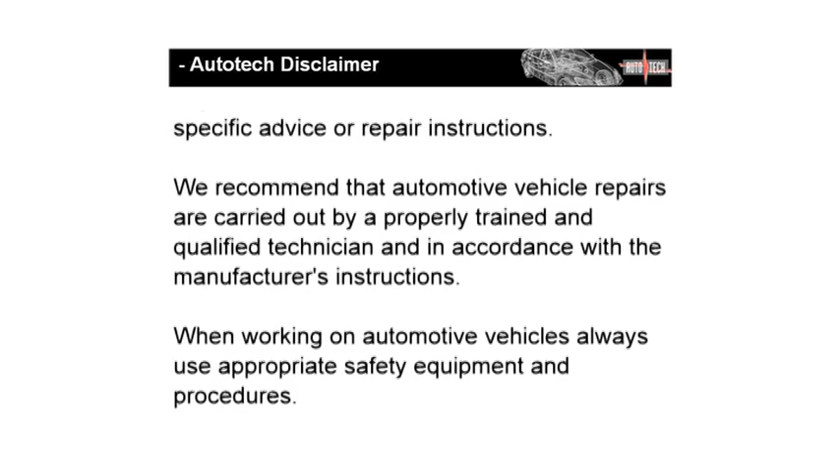This training video has been prepared for automotive mechanics who are trained in the repair and servicing of automotive vehicles and the use of related tools and equipment. The information contained in this training video is general in nature and does not contain specific advice or repair instructions. We recommend that automotive vehicle repairs are carried out by a properly trained and qualified technician and in accordance with the manufacturer's instructions. When working on automotive vehicles, always use appropriate safety equipment and procedures.

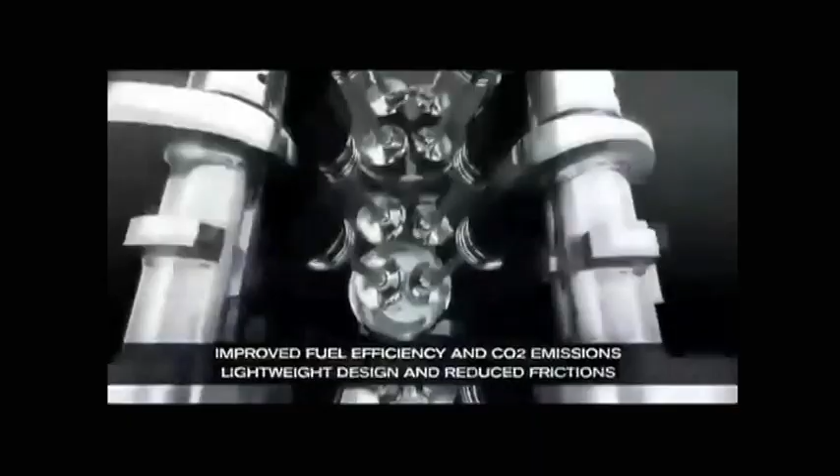Direct petrol injection, or DPI, was first invented in 1925 and was subsequently used in military aircraft engines during the years of World War II. Unsurprisingly, the first automotive application of DPI was initiated by Bosch in the 1950s. Over the following years, many experiments were carried out by Bosch trying to make this technology a success, but DPI was temporarily discontinued due to its high cost with little gain.

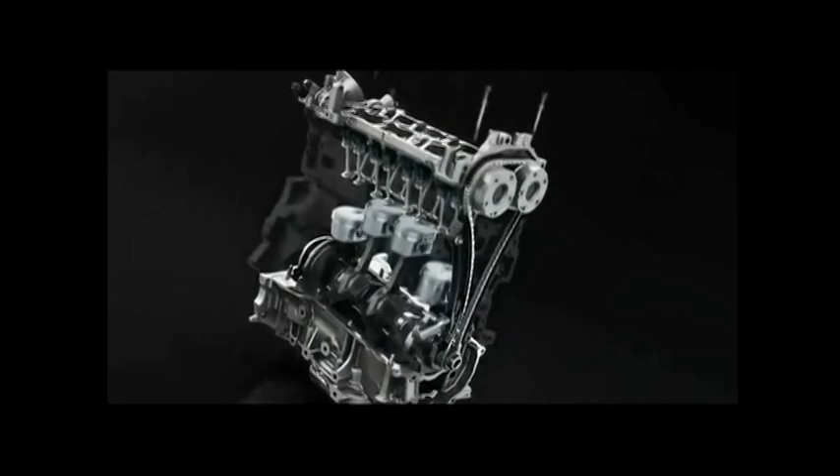Stepping forward into the modern era, it was Mitsubishi in 1996 that became the first mass producer of direct petrol injection technology. Since that time, nearly every mainstream manufacturer has designed and implemented their own version of the technology.

The topics that we'll cover during this video are the operating fundamentals of direct petrol injection. We'll look at the different components that are used and the repair and diagnostic procedures of each of them, the requirements for servicing, common issues that have been brought to our attention, and E85 fuel technology.

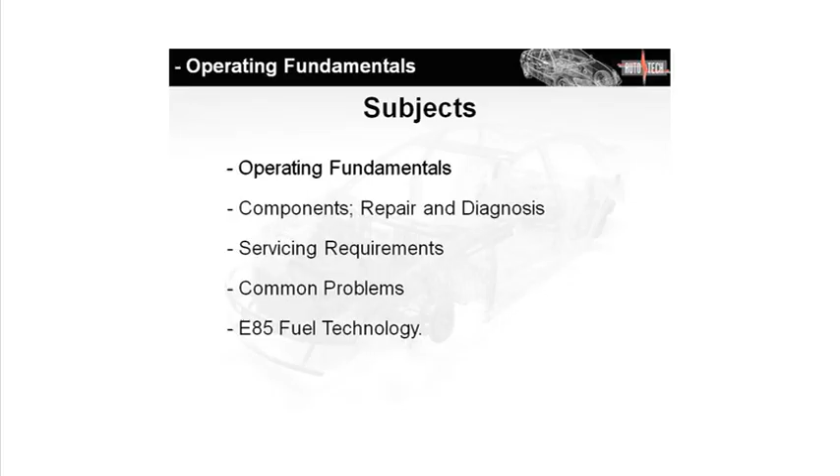A regular question we get asked is, why are manufacturers replacing traditional EFI systems with DPI? After all, a DPI system is more complex in both mechanical and electrical components. The answer is its ability to lower the exhaust emissions.

This chart shows clear evidence how exhaust emission levels have become tighter over the years and will continue to reduce in the future due to the requirements of Australian design rules. One of the biggest drivers of technology improvements in an engine is the car manufacturer's need to reduce exhaust emissions.

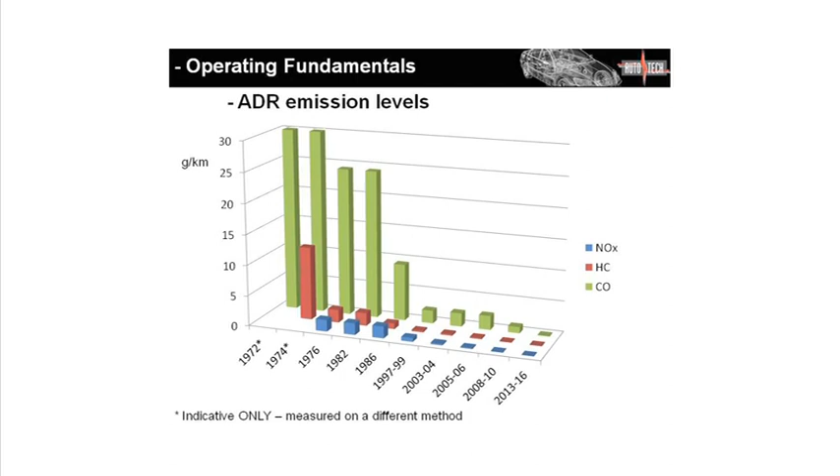Manufacturers are constantly searching for ways to improve fuel economy and ultimately reduce exhaust emissions. A list of technologies currently possible is shown here, showing each respective fuel saving. The column on the right indicates how beneficial DPI technology can be when compared to other technologies.

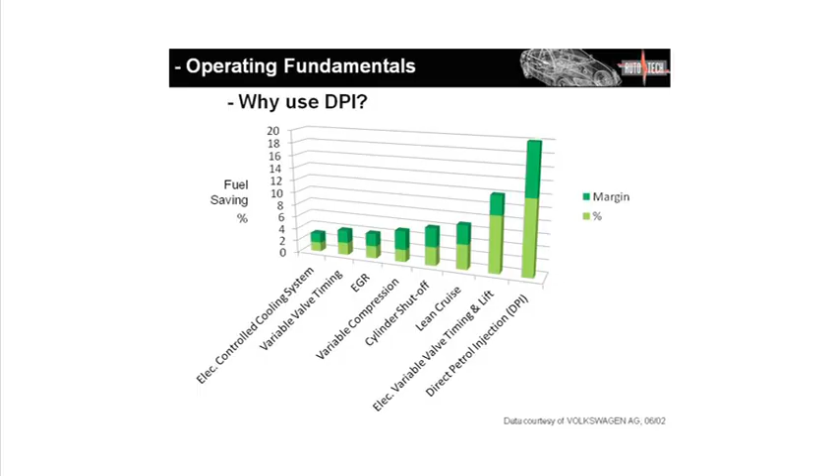So how many makes and models can you think of that have direct injection fitted? Here is just a small list of some of the most popular vehicles in the Australian market that use DPI. At the time of this video production, there were well over 1,500 models delivered by 24 manufacturers using direct injection technology. The first vehicle sold in the Australian market was an Alfa Romeo JTS back in 2003.

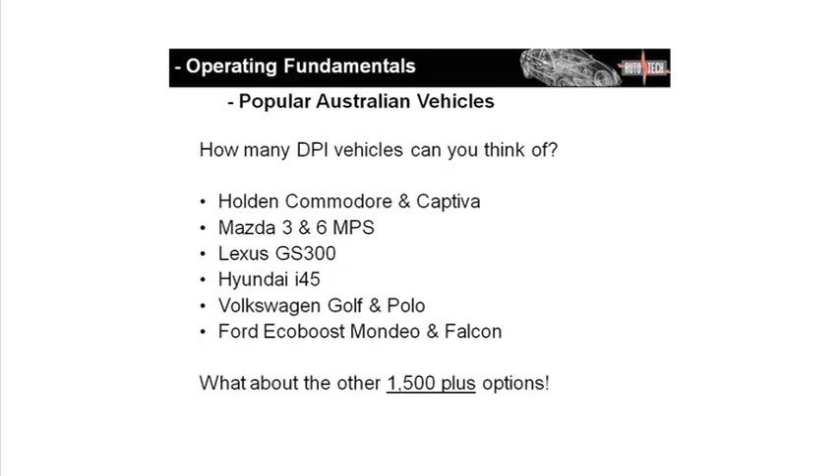When describing how direct petrol injection systems work, some unusual terms are used. These words describe the different operating modes of a DPI system: homogeneous charge mode and stratified charge mode.

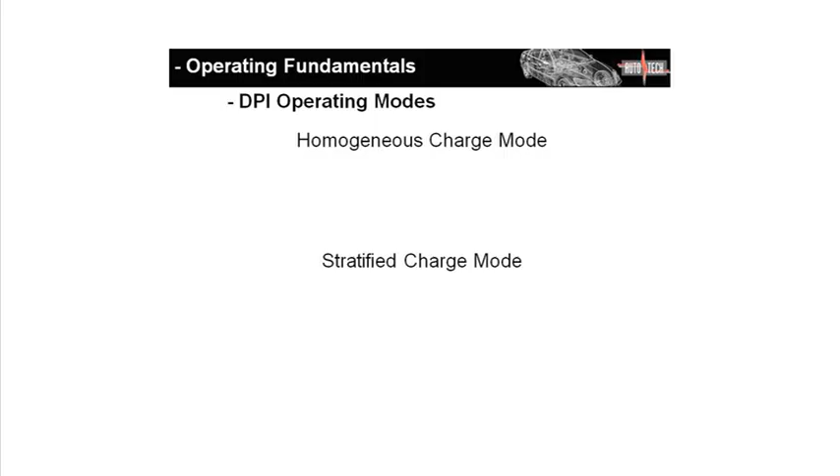Homogeneous means it's uniform in structure or composition. Putting that into real terms, it means that the fuel and air combination are well mixed in the cylinder. Stratified means to form layers. This is the opposite of homogeneous and describes when the fuel charge remains densely packed below the spark plug electrode.

First, let's explain homogeneous in a bit more detail.

As the piston starts the intake stroke, air enters the cylinder through the intake valve, and fuel is injected into the incoming air, resulting in a fairly well mixed or homogeneous air-fuel ratio. We also know this as stoichiometric ratio at about 14.7 to 1.

A benefit of injecting fuel into the air as it enters the combustion chamber is that the energy required to evaporate the fuel comes from the air itself. That air then cools as a result of the evaporation, effectively increasing the density of the air. The rest of the combustion cycle is similar to that of traditional EFI port injection.

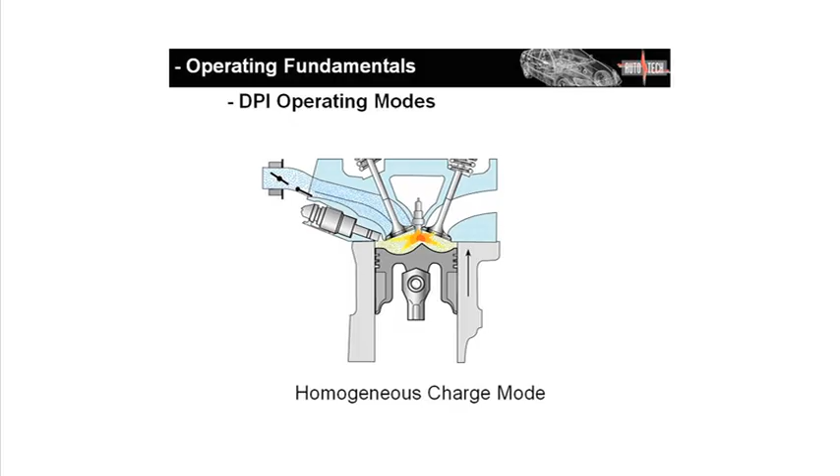Now let's look at stratified mode. As the piston starts the intake stroke, you can see that only air is entering the cylinder. You'll also notice that the intake manifold flap has closed off one manifold port. When the piston reaches the bottom of the stroke, you'll notice there is still only air entering the cylinder.

As the piston starts to compress the air, the shaped piston crown starts to have an effect on the way the air moves in the cylinder. It starts to loop upwards toward the spark plug electrode.

Nearing top dead centre, the fuel is injected. It's deflected upwards towards the spark plug by the shaped piston crown and focused in the area of the spark plug electrode. You can see here how the contents of the cylinder have become layered or stratified, forming a rich fuel mixture around the spark plug, leaving the remaining lean mixture to form a layer which insulates the cylinder wall from the heat of combustion.

Stratified charge mode injects very little fuel compared to that of homogeneous mode and can produce an air-fuel ratio of as little as 60 to 1.

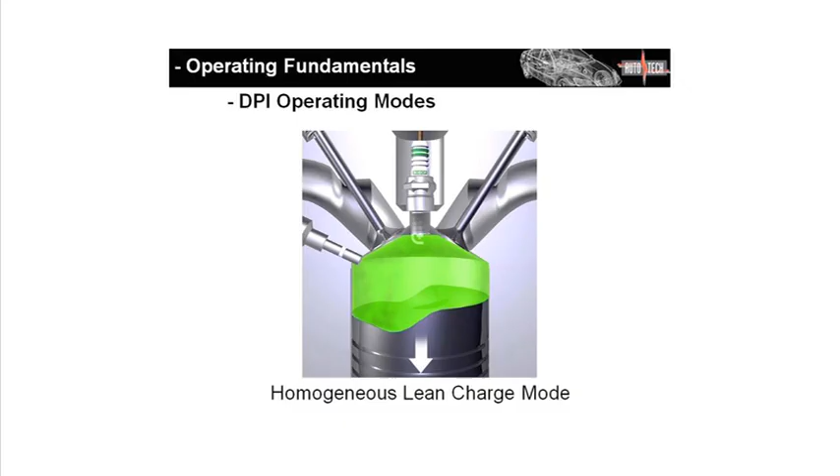There are a few variations of these two main modes. One of these is homogeneous lean charge mode. This works the same as the basic homogeneous mode, but runs a leaner air-fuel ratio of up to 22.8 to 1. The throttle plate will open to a greater amount to maximise airflow into the cylinder.

There are also various other injection modes that use a combination of both homogeneous and stratified. A combined homogeneous and stratified mode injects a lean fuel mixture on both the intake and compression stroke during changeover between the two different modes.

Homogeneous split mode will inject fuel in both the induction stroke and late in the power stroke to enable the catalytic converter to warm up quicker from the hot exhaust gases. This mode only operates for approximately 20 to 40 seconds after startup.

Homogeneous knock prevention mode means that under full engine load, the engine can receive 2 separate fuel injection events per combustion. This means that the ignition doesn't need to be retarded when engine knock is sensed, meaning peak power output can be maintained.

Stratified charge start mode is used during cold engine starts. This way, the fuel vaporizes quickly and doesn't wash the cylinder walls. This also ensures maximum fuel efficiency and minimal emissions during cold starts.

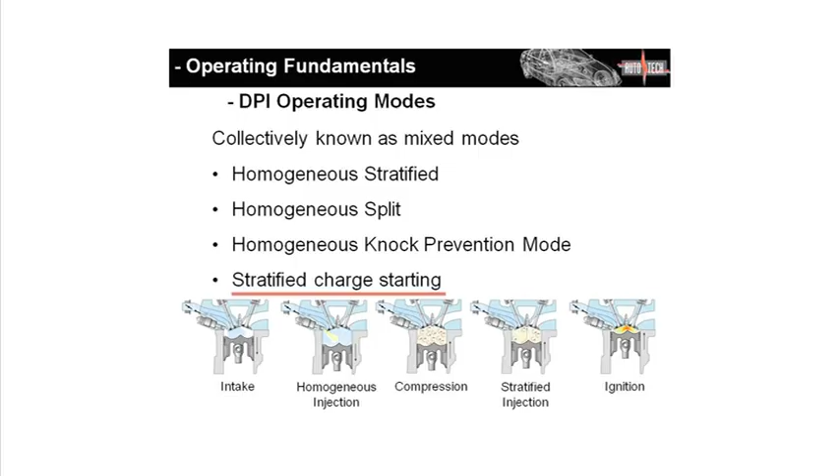This technology is great, but how many of these modes does Australia use? Unfortunately, the answer to that is not many. The main reason for this is due to the high sulphur content of Australian fuel.

Most of the stratified injection modes burn at quite high combustion temperatures. 2 unwanted gases are caused by this combustion heat: oxides of nitrogen, which are fairly easy to control, and oxides of sulphur, which are much more difficult to handle.

When a fuel mixture leaner than the stoichiometric ratio of 14.7 to 1 combusts, the nitrogen gas present in the air burns or oxidizes and becomes what we know as oxides of nitrogen, or NOx. The NOx produced by lean engine operation can be reduced to some extent by mixing EGR with the incoming air to lower the combustion temperature.

However, the EGR method will only work for lean mixtures up to about 22.8 to 1. To control NOx for the ultra-lean 60 to 1 air-fuel ratio that stratified charge mode is capable of, the vehicle requires a NOx filter in the exhaust system.

A NOx filter essentially looks the same as a traditional catalytic converter, but contains a chemical called barium oxide. When the filter temperature is between 250 and 500 degrees centigrade, the NOx gases are trapped in the barium oxide substrate. When the filter becomes soaked in NOx, a NOx sensor triggers the PCM to temporarily burn at a slightly richer homogeneous charge mode to regenerate the NOx filter.

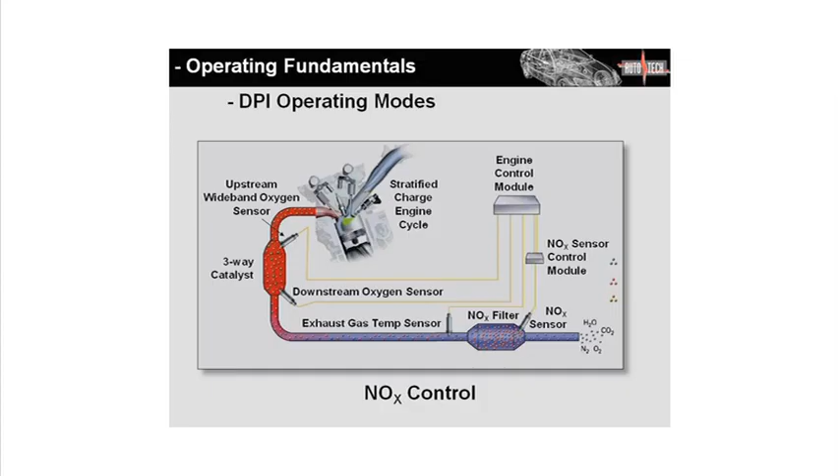This system works really well to control excessive NOx gases, until you add sulphur to the equation. The high levels of sulphur found in Australian fuel oxidizes in the combustion chamber and generates oxides of sulphur, or SOx. Unfortunately, SOx gases are chemically similar to NOx gases and are also trapped in this filter, but can't be removed by the vehicle's regeneration process.

This is the reason that the Australian market can't use the full capability of stratified injection mode, as it only operates properly with fuels containing less than 10 parts per million of sulphur. Australian fuel currently has up to 50 parts per million in premium unleaded petrol and up to 150 parts per million in regular unleaded.

With the spray-guided type, the injector points down at the top of the piston, with the spark plug electrode in close proximity to the injector nozzle. The injector sprays fuel into the combustion area below the spark plug.

The wall-guided injector points at approximately a 90-degree angle to the shape on the crown of the piston known as a wall. The piston wall directs the rich air-fuel mixture into the desired combustion area directly below the spark plug.

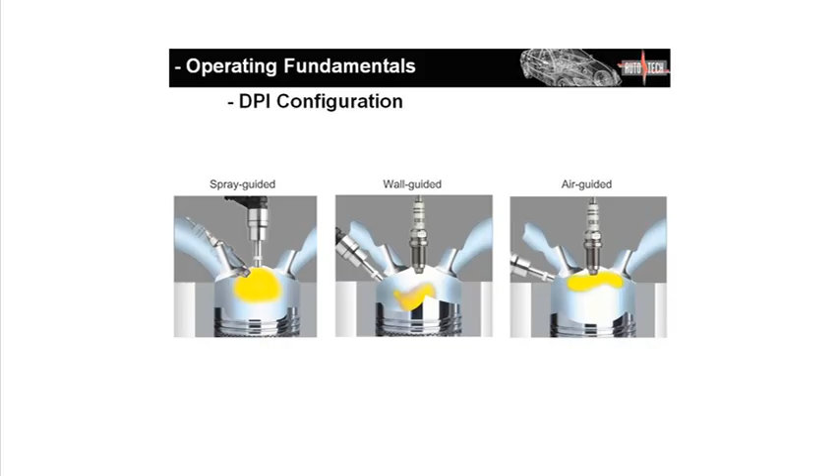The third main type is the air-guided injection setup. This engine construction sprays fuel into the general area of the spark plug, then uses the turbulence created by the incoming air to concentrate the fuel charge below the spark plug.

These engines have been designed by engineers to produce air swirl and tumble patterns that will assist the intake air charge to correctly mix with the fuel. Be aware that modifications made to any of the components related to the intake or exhaust system may result in fuel usage or emission levels increasing.

We'll quickly recap the benefits of using direct petrol injection. We get an increase in volumetric efficiency due to the fact that the fuel injector tip and fuel spray no longer obstruct the incoming air.

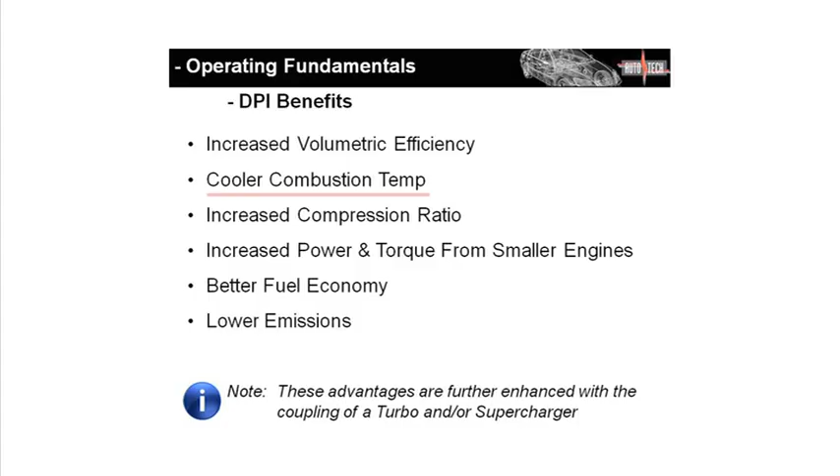A cooler combustion temperature can be achieved due to the evaporation of the fuel inside the cylinder, having the effect of cooling the air charge. The cooler combustion temperature allows the use of a higher compression ratio, resulting in the same power output from a smaller engine capacity, better fuel economy, and lower emissions.

All of these advantages are further enhanced with the use of a turbocharger or a supercharger.

The next section of this video will walk you through each of the components that you're likely to find on a vehicle fitted with direct petrol injection.

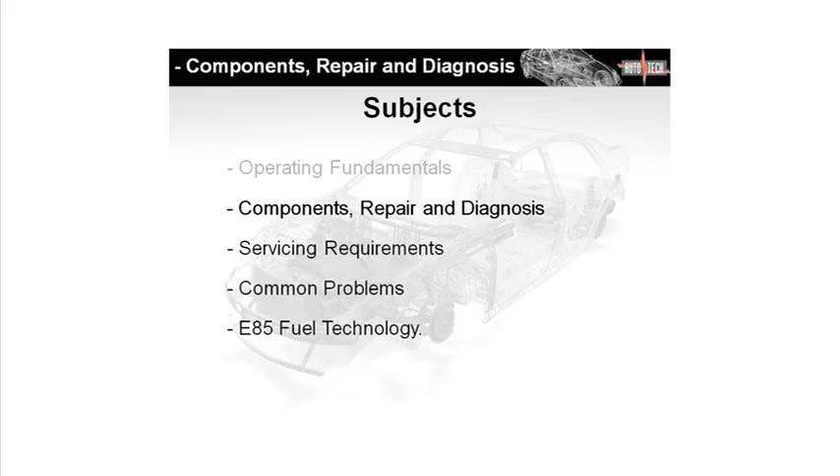The engines we're going to use as examples are the 2.3 litre turbo engine fitted to the Mazda 3, 6 and CX-7; the 2 litre FSI engine from the Volkswagen Audi range; and the 3.6 and 3 litre engines fitted to the Holden Commodore and Captiva.

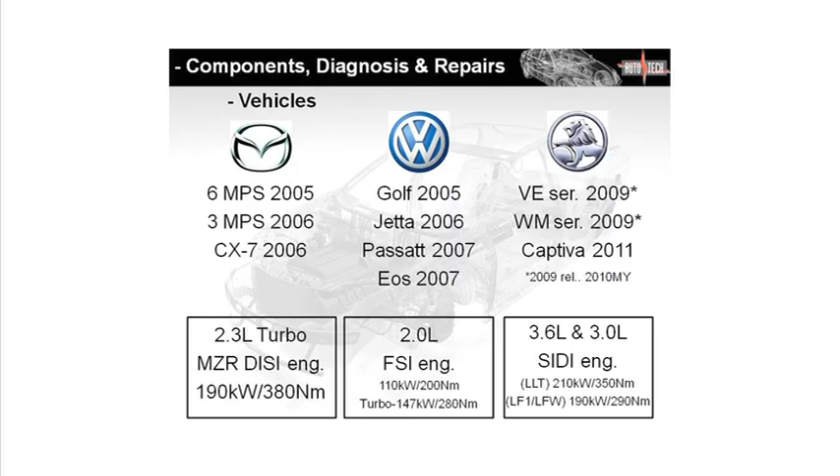Let's start with the fuel system. The first component we'll look at is the in-tank fuel delivery unit.

The fuel delivery unit is much the same as that of a port EFI injection system. It delivers fuel at a relatively low pressure, and all three vehicle models we're going to look at in this video have the ability to vary the pressure during idle and other low-demand situations. This pressure reduction reduces any unnecessary heating or agitation of the fuel, resulting in less evaporative emissions from the fuel tank. These fuel senders will normally contain a fuel level sender and in some cases incorporate a filter.

Let's have a look at each model specifically. You'll notice that the manufacturer's logo appears when we look at specific models. In this case, on the top left of the screen, you can see we're looking at the Mazda setup.

The Mazda system delivers fuel at a pressure of between 410 and 490 kilopascals when tested with a scan tool. I'll explain how to do fuel pressure testing a bit later on in the video. This is a non-return type system, and the ECM can control the pump to operate at two different speeds. The fuel pressure is reduced at idle using a 0.3 ohm resistor in line with the power supply. This pump contains an integral fuel filter with a replacement scheduled every 150,000 kilometres. Access to the pump can be gained by lifting the rear seat.

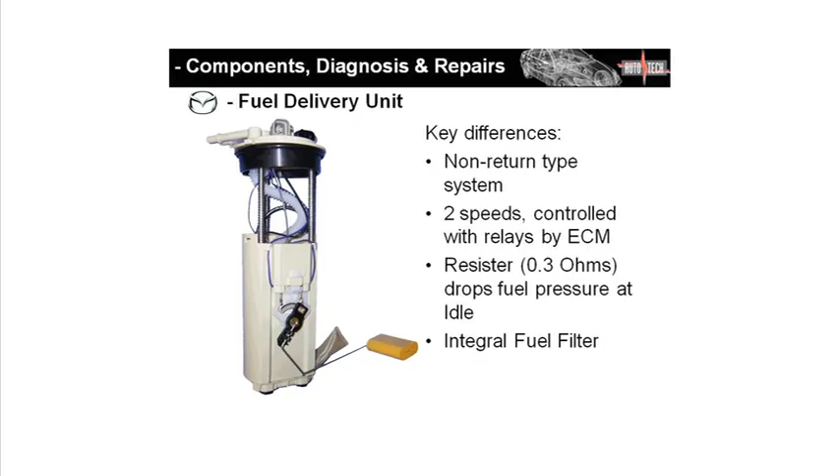The Volkswagen fuel pump uses an external fuel filter, which incorporates a pressure-limiting valve. Like the Mazda, this pump can be accessed by lifting the rear seat base. Its speed can be varied by the ECM to suit the exact needs of the engine. The fuel pump speed is controlled by the ECM via a fuel pump control module using a pulse width modulated signal. The red shape you can see here is the control module mounted to the fuel pump access plate.

The fuel pressure can vary anywhere between 50 and 500 kilopascals, depending on engine demand, although on startup this pressure will temporarily increase to 650 kilopascals. Interestingly, this fuel pump is energised as soon as the driver's door is open, allowing the fuel system to prime well before the ignition is turned on.

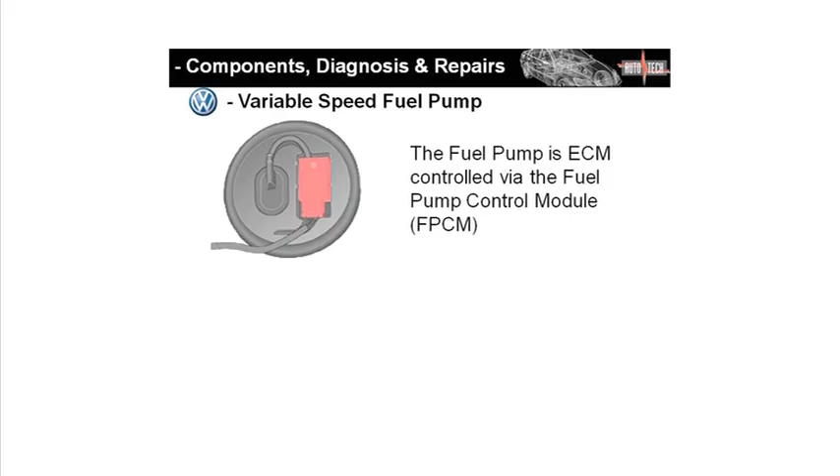The Holden fuel delivery unit is variable speed, and can deliver fuel pressure between 345 and 415 kilopascals. A replaceable filter is located within the unit. The 3.6 litre pump can only be accessed by removing the fuel tank from the car, and there is no scheduled replacement for the filter.

The 3 litre pump is easily accessed from below the rear seat. The scheduled replacement for this filter is every 90,000 kilometres, but only under severe operating conditions.

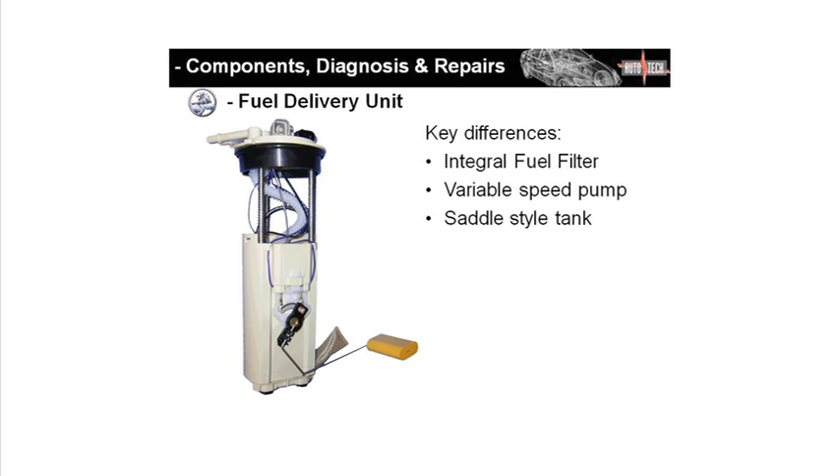The fuel pump speed is controlled by the ECM via a separate fuel pump module. This module can be found below the battery in the luggage compartment. These modules communicate via the high-speed CAN network.

The fuel pump control module sends a pulse width modulated signal to the fuel pump to vary pump speed depending on engine demand. A fuel pressure sensor in the fuel line provides fuel pressure feedback to the control module. At maximum pressure, the fuel pump control module will deliver 15 amps to the fuel pump.

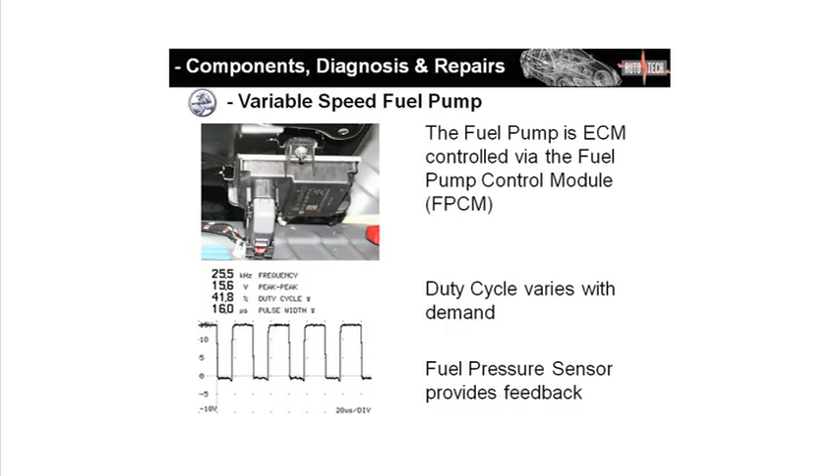Saddle-type fuel tanks are used by many manufacturers, including Holden, and are designed to accommodate the tail shaft. A transfer pump is used to transfer fuel from one side of the hump to the other. There are two ways of transferring fuel.

An active transfer pump is a second electric pump that operates independently of the main fuel pump. A suction transfer pump is not electric, but uses pressure from the electric pump to pull fuel over the hump using the Venturi effect. The Holden systems use a suction transfer pump.

The next component we'll look at is the low fuel pressure sensor. The low pressure fuel sensor in the Volkswagen system is located on the high pressure fuel pump housing. This sensor provides feedback to the ECM, and this sensor's reading can be checked using a compatible scan tool.

The sensor on the Holden is located on the driver's side of the fuel tank in the fuel line. You can access this sensor from under the vehicle. This sensor is connected to the fuel pump control module, and the pressure can be checked using a compatible scan tool.

Mazda do not use a feedback sensor for the low pressure fuel system.

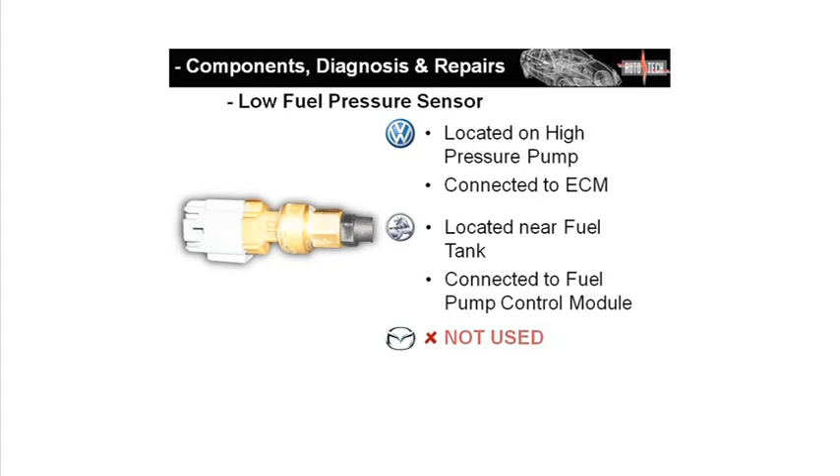As mentioned earlier, a scan tool can be used to check the fuel pressure. However, there is also a manual procedure for doing this. On the Holden system, you'll find a Schrader valve located between the inlet manifold and the firewall. Here's another view of that valve using a schematic diagram.

Holden direct petrol injection systems also use a fuel pulsation dampener in the fuel system. This is designed to minimise any ripples in the fuel pressure caused by the high-pressure fuel pump operation.

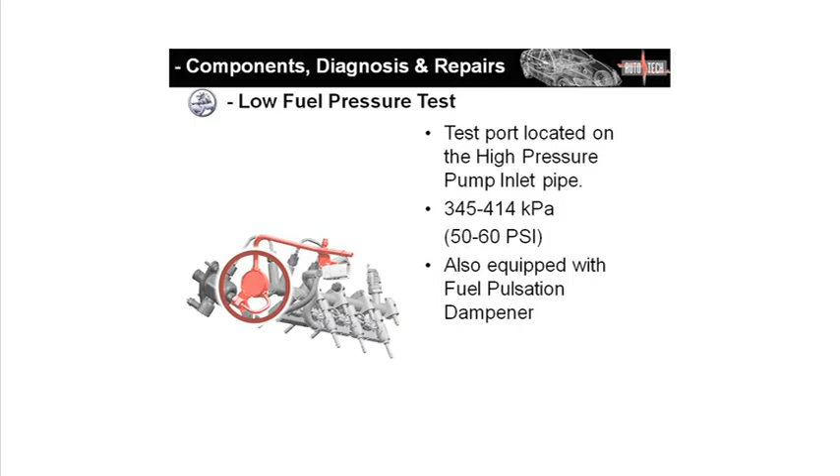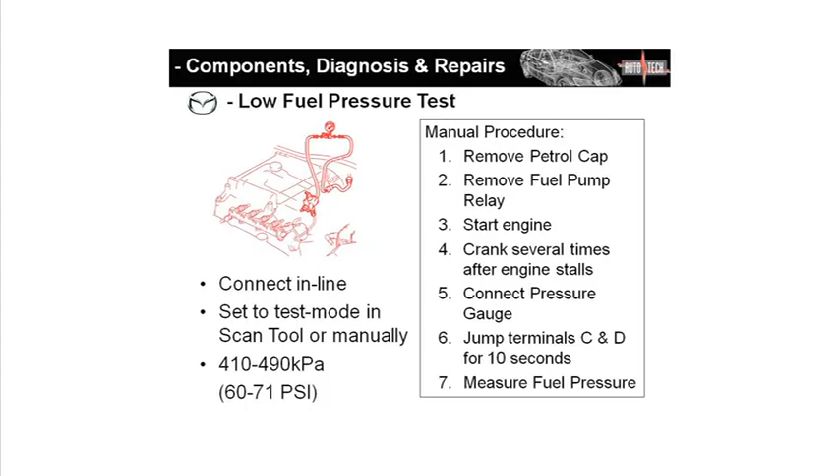To test a Volkswagen fuel pressure, disconnect the outlet fuel line at the filter and attach an inline pressure gauge. The engine must be idling, and the fuel pressure should be between 350 and 500 kilopascals.

The next component that we're going to look at is the high-pressure fuel pump. Some interesting facts about the high-pressure fuel pumps used on each of the vehicles featured in this video are that they all use a single piston to create the high fuel pressure. They are all driven directly from the camshaft, and they all have a fuel pressure regulator on the pump. Most importantly, the pressure produced by this pump can only be checked using a compatible scan tool.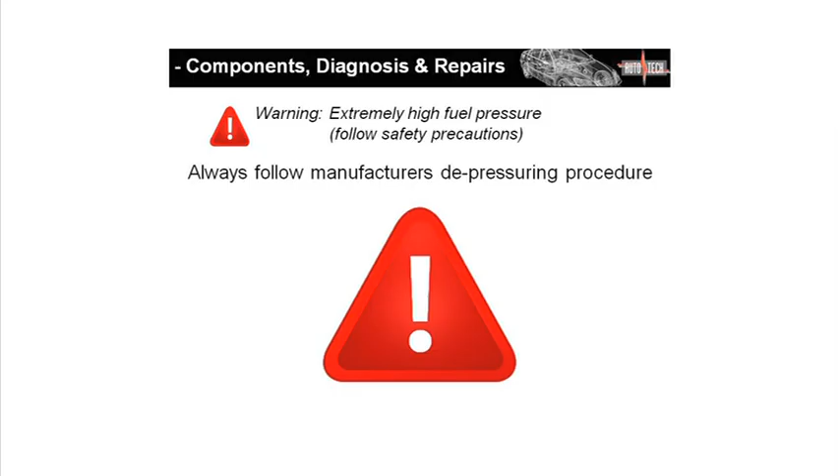Before working on the high-pressure system, always ensure you follow the manufacturer's procedure to remove the fuel pressure from the system. Some examples of safe methods are to use a scan tool to depressurize the system. If you don't have a scan tool, wait at least 2 hours before opening the high-pressure system.

And always ensure you're wearing the correct personal protective gear. Remember, fuel spray is extremely flammable. Always ensure that you work safely.

Here is a schematic diagram of a high-pressure fuel pump. The shape and design of this pump will vary between vehicles. However, the main components listed here are universal. These descriptions can be found in your book on page 39.

The fuel pump does not use an oil supply to lubricate the internal components, and petrol isn't adequate to lubricate the highly stressed surfaces, so the pump gets its lubrication from a Teflon coating. It's interesting to note that the number of cam lobes on the pump drive bears no relationship to how many cylinders the engine has. For example, Mazda's 4-cylinder DISI engine has 3 lobes on the camshaft.

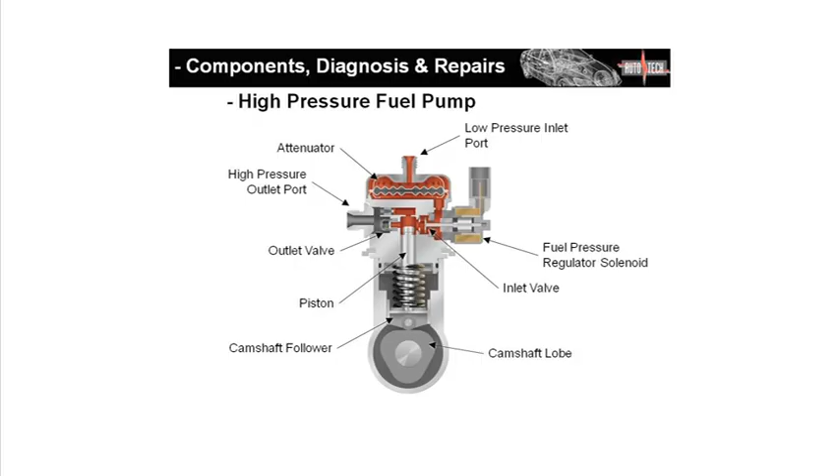The high-pressure fuel pump operation can be split into 3 phases: the intake, the return, and the delivery phase. Let's have a look at each of these phases in detail.

The first phase we'll look at is the intake phase. As the piston moves in a downward direction, it creates a low pressure, or suction, in the area above. Because the fuel pressure regulator solenoid is not energised, this valve is open and low-pressure fuel is allowed to flow from the fuel tank into the chamber above the piston.

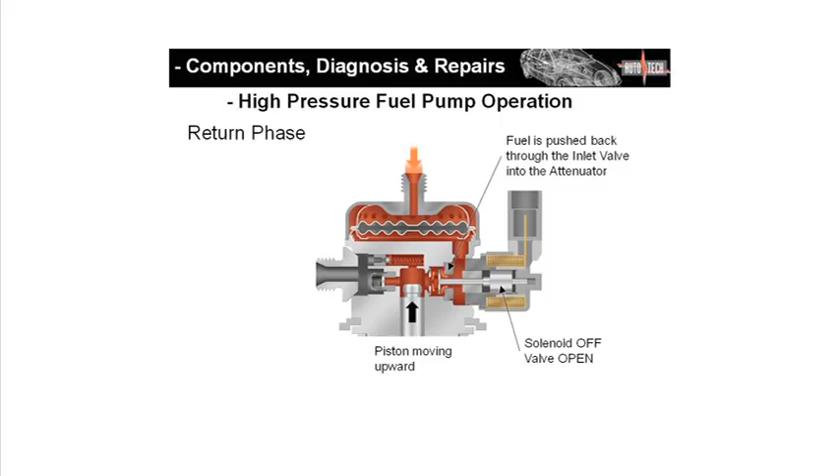In the return phase, the piston starts to move upwards following the cam lobe. The solenoid is still off, meaning that a small amount of fuel is pushed back into the low-pressure line into the attenuator. The attenuator is designed to absorb and hold this returned fuel, ready for the next intake stroke.

There are 2 parts to the delivery phase. In part 1, the piston continues moving upwards, and at a stage decided by the ECM, the fuel pressure regulator control solenoid is energised and the inlet valve closes. The pressure created by the piston is now directed out of the check valve and into the fuel rail. The ECM knows the exact position and direction of travel of the pump piston thanks to the camshaft position sensor. It uses this information to energise the pressure control solenoid at exactly the right moment to deliver a precise quantity of fuel to maintain rail pressure.

In part 2, at a pre-calculated point during the fuel delivery phase, the ECM de-energises the regulator control solenoid. The force of the fuel pressure acting on the back of the inlet valve means that it remains closed and the fuel continues to be delivered to the fuel rail. This method of operation allows the solenoid time to stabilise before it is re-energised again by the ECM in the next cycle.

The Volkswagen engine has a 2-lobe camshaft drive, and as we saw earlier, the high-pressure fuel pump incorporates the low-pressure fuel sensor. This pump has the ability to operate at pressures up to 11,000 kilopascals depending on engine demand.

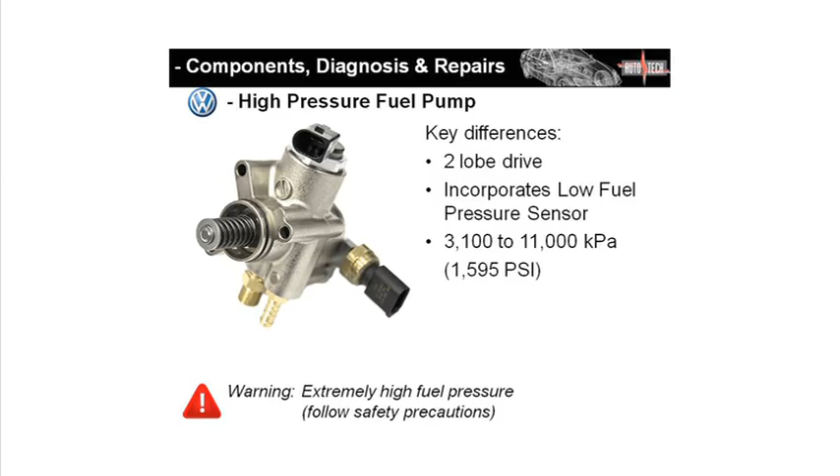Mazda use a 3-lobe camshaft to drive the fuel pump. When testing this fuel pump, Mazda specified the test to be carried out under 2 different conditions. The first test should be carried out at idle, with a pressure specification of approximately 3,000 kilopascals. The second test requires you to dial the pump load to 60% using a compatible scan tool and then read the pressure. The pressure specification for this test is 11,500 kilopascals. Remember, this pressure reading can only be tested using a scan tool.

If you ever carry out work on one of these pumps, be very careful not to break the seal between this connection and the pump. If the union is allowed to turn during removal or installation, even by a small amount, Mazda state that the whole pump must be replaced.

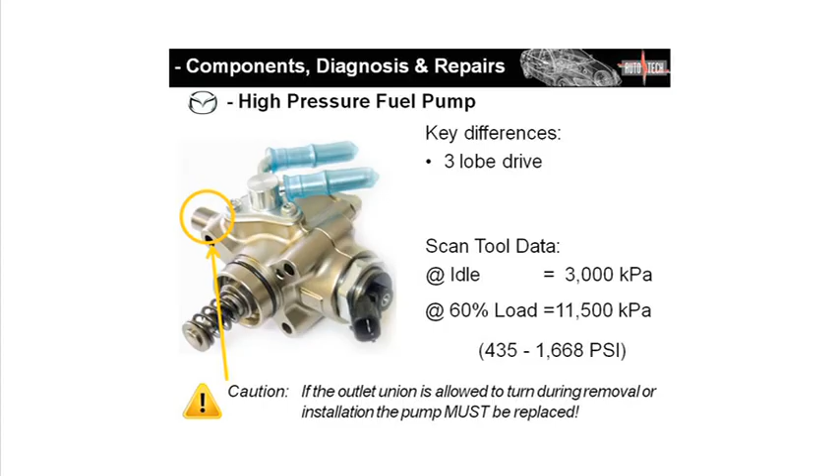The next components to look at are the fuel rail and injectors. As the fuel injector tip must reach into the combustion chamber, you'll usually find that the fuel rail and injectors are located below the intake manifold. Gaining access for testing or replacement of either the injectors, the fuel rail, or the fuel pressure sensor can be difficult and usually requires the removal of the intake manifold.

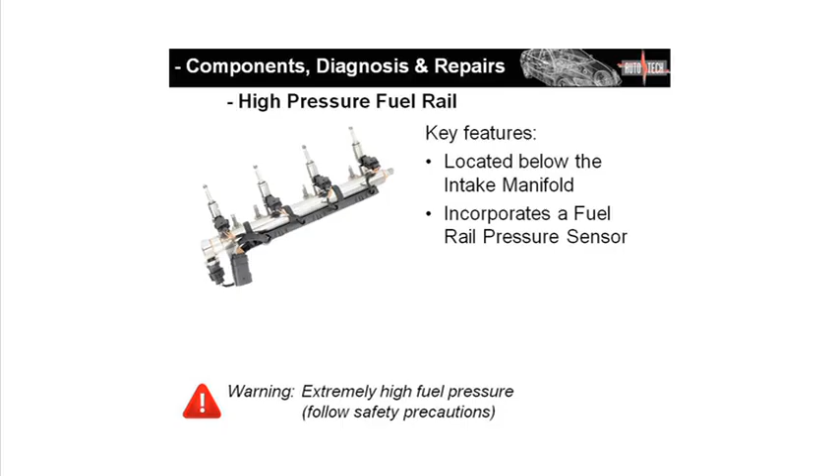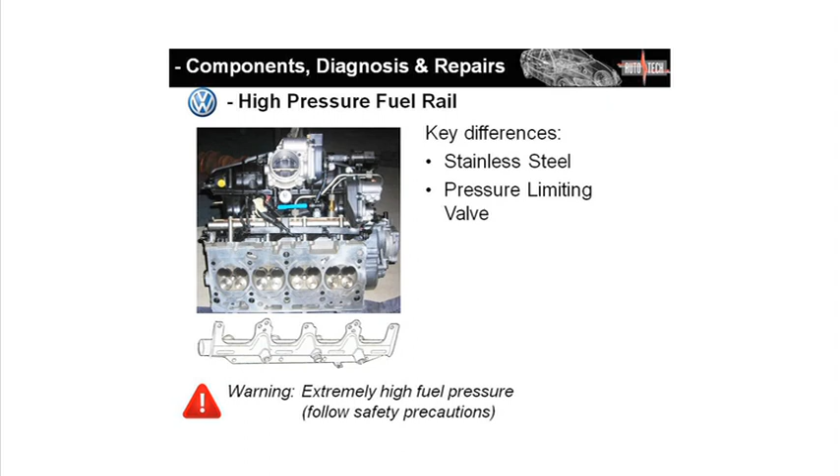This is a Volkswagen FSI fuel rail setup. In this picture, we're looking at the fuel rail from beneath the cylinder head. The rail is slightly different in the fact that it's made from stainless steel, but still tucked away under the inlet manifold. Again, a pressure limiting valve allows fuel to escape back to the tank if the pressure exceeds 12,000 kilopascals.

On each of the vehicles we've looked at, the operation of the fuel rail pressure sensor is very similar. Each sensor has a 5-volt supply, a ground wire, and a signal wire. The ECM receives a varying signal voltage on the signal circuit depending on the pressure sensed. When the fuel pressure is high, the signal voltage is high. When the fuel pressure is low, the signal voltage is low.

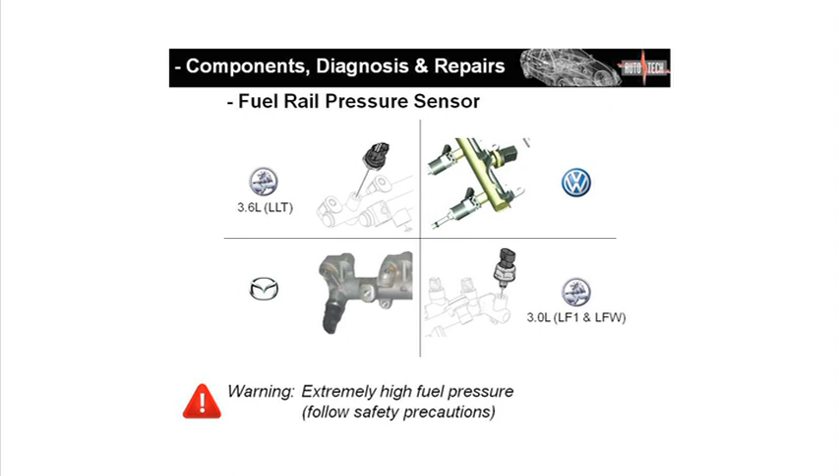Mazda state that the fuel rail pressure sensor must not be removed from the fuel rail. If the sensor is diagnosed as faulty, the complete fuel rail assembly must be replaced.

The high-pressure fuel pipes are different between the Holden models. There are 2 pipes for the 3.6 litre engine and 1 pipe for the 3 litre version.

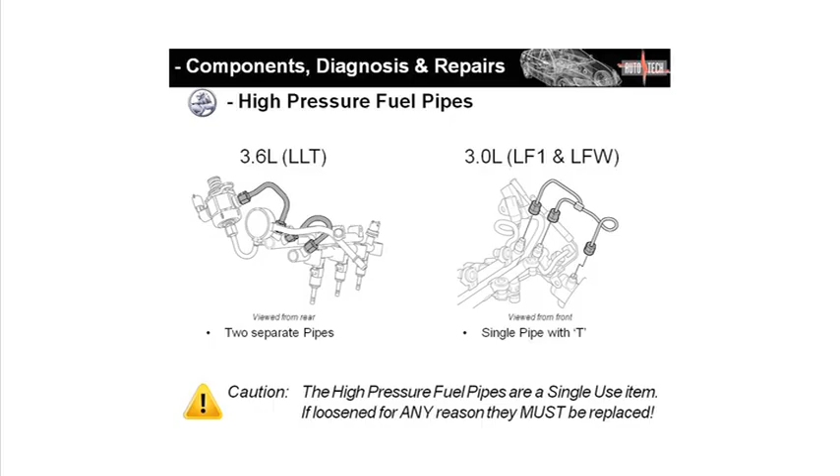The fuel injectors are solenoid operated and, depending on manufacturer, use up to 100 volts to fire. The tip of the injector fits directly into the combustion chamber, and in most cases, the injector is held in by the fuel rail bolts.

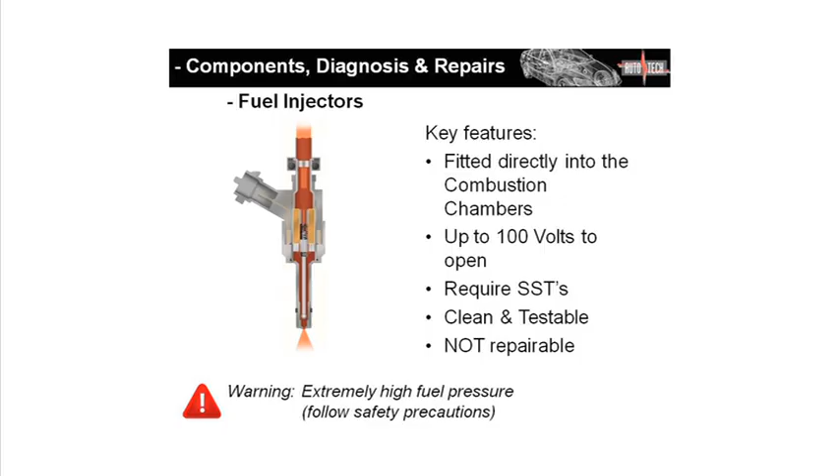Most manufacturers require the use of special service tools to remove the injectors for seal replacement or cleaning. At the time of filming, most manufacturers state that these injectors are not repairable, other than cleaning on a test bench.

The fuel injector internal components are similar to that of a port fuel injector. However, the environmental conditions under which it operates are somewhat different.

This is a scope pattern from a traditional EFI port fuel injector. It is negatively controlled, so when the circuit is earthed by the ECU, the injector opens. When the ECM opens the circuit, a voltage spike is induced in the injector circuit due to the magnetic field collapsing over the injector coil windings. Sometimes this spike can reach as high as 90 volts and can delay the closing time of the injector needle by up to 1 millisecond.

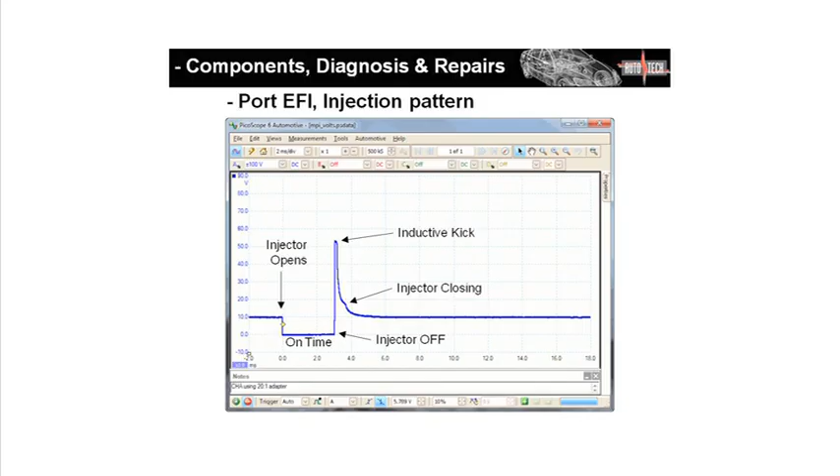Once the injector has opened, the voltage is lowered to battery supply voltage and is held open with a duty cycle for the required length of time. To close the injector, it uses a negatively controlled signal. A duty cycle signal is used to control the amount of current flowing through the low resistance windings of the injector. Typical winding resistance is between 1.25 and 1.75 ohms.

The fuel injectors for the Holden vehicles are different depending on engine size. The serviceable components are named on the screen and should be replaced whenever the fuel injector is removed. Notice that the seal on the injector tip is made of Teflon to overcome the heat of combustion while maintaining a good seal.

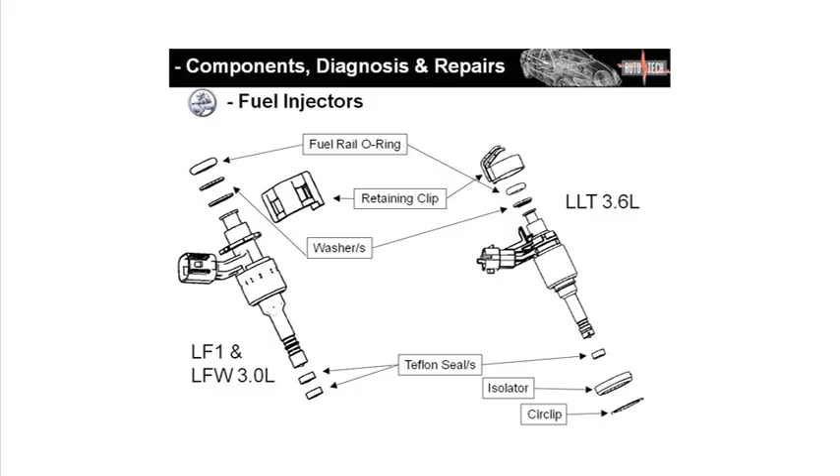One of the downsides to using such high fuel injection pressures is the injector noise that occurs due to excessive injector movement. The high voltage acting on the injector causes rapid needle movement, and this can be heard externally. To reduce this noise, an isolation cup is fitted to the fuel injector body, which is mounted between the fuel injector and the cylinder head.

This is only fitted to the Holden 3.6 litre engine. The isolation cup absorbs some of the energy transmitted through the cylinder head and reduces the harsh ticking noise that can be heard on some other direct injection fuel systems.

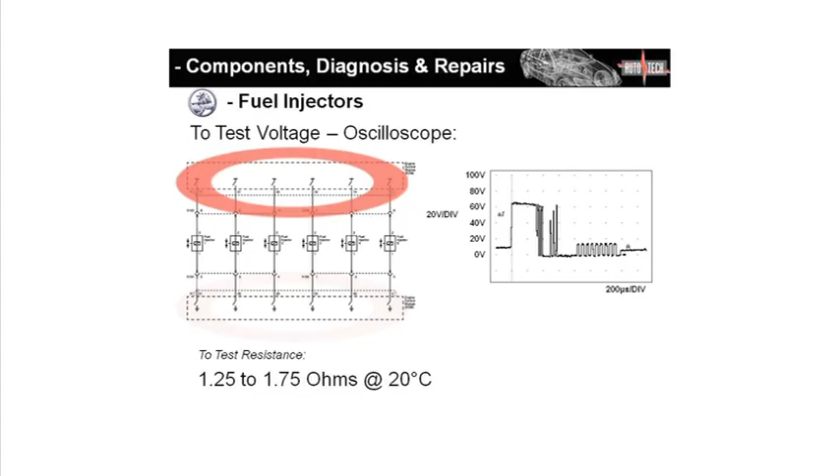This is a wiring diagram for the Holden engine. You can see each injector is individually controlled by the ECM on both the positive side and the negative side of the circuit. The only safe way of testing the voltages in this circuit is to use an oscilloscope.

This is a Mazda fuel injector. You can see it is very similar to the injector we just saw, the only difference being that Mazda do not use Teflon to seal the tip.

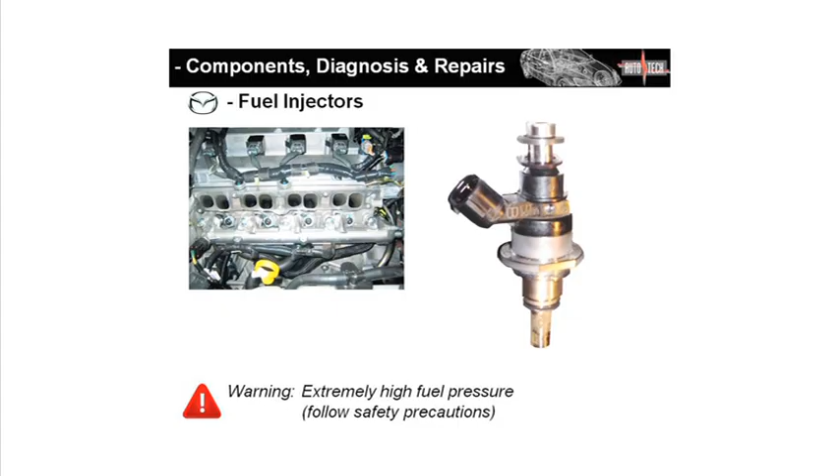Removing the injectors from the vehicle is relatively easy, providing you follow the instructions contained in Mazda's technical procedure for injector number 3. This instructs you to cut off a small section of the oil separator to allow access. This saves having to remove extra components.

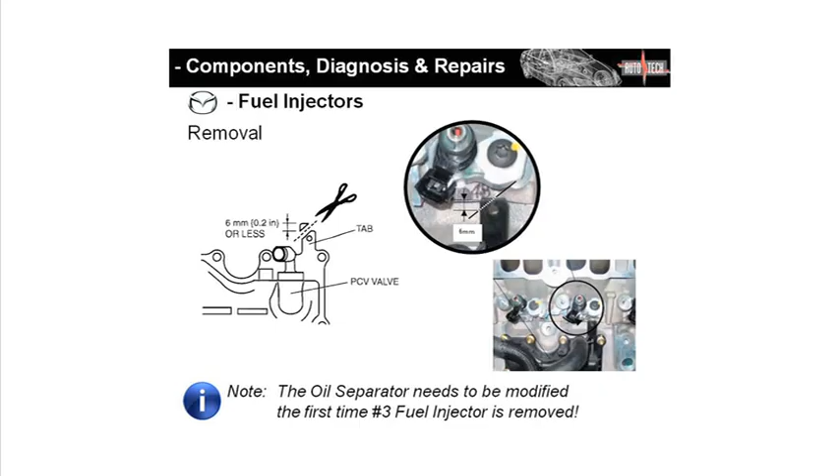The operation of the Mazda injectors is similar to that of the Holden system, in that they use approximately 65 volts to open the injector, and then a duty cycle to keep them open. The differences are that they are not individually controlled on both the positive and negative sides of the circuit, and that power is supplied to the injectors in groups of 2. To test these voltages, you should use an oscilloscope.

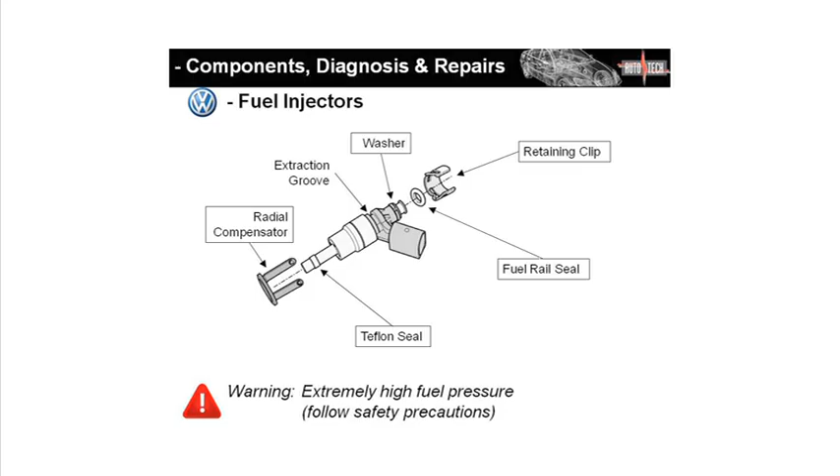This image shows the 2-litre FSI injector from the Volkswagen. Again, the items listed in the boxes around the injector are the serviceable components. The radial compensator does the same job as the isolator on the Holden and must be replaced every time the injector is removed. To remove this injector, you must break the tags off using a suitable tool.

Operating voltages should only be checked using an oscilloscope, and the injector voltages are slightly higher than those previously seen. The Volkswagen injectors are opened using 90 volts. Then the voltage is reduced to approximately 30 volts to keep them open. The resistance of these injectors is between 0.5 and 2 ohms.

Here is the service kit that is available for the Volkswagen injectors. And here is the special toolkit. It contains everything you need to remove and install the injectors.

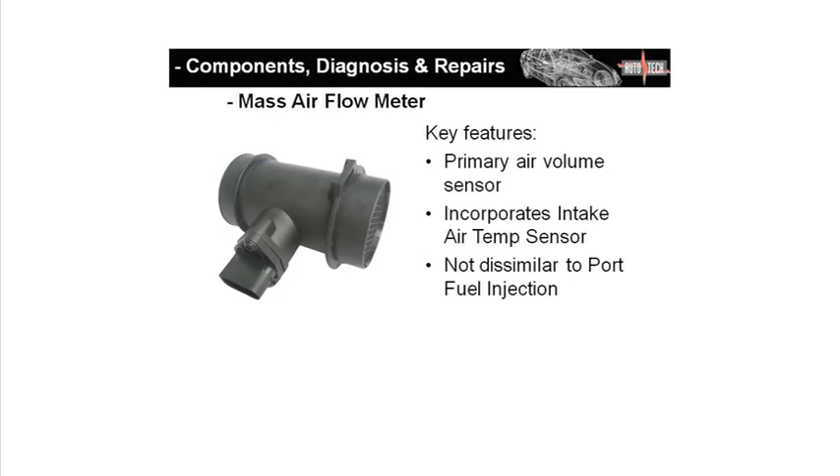The next components that we'll take a look at are in the intake system, starting with the mass airflow sensor. The mass airflow sensor does exactly the same job on a DPI vehicle as it does on a port injection engine. It measures how much air is entering the engine and normally incorporates an intake air temperature sensor.

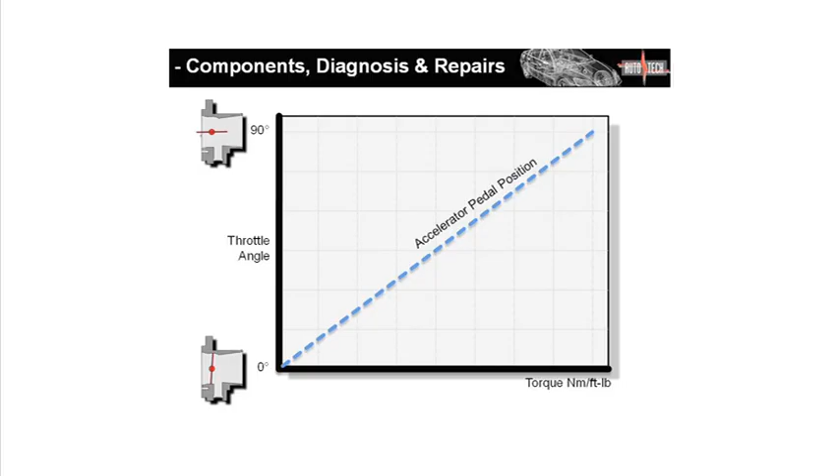Next is the electronic throttle body. The throttle body's design is not dissimilar to that of a port injection system. However, it can be used in a very different way. The left-hand side of this graph shows throttle angle. The line at the bottom shows torque produced from the engine, and the dotted line represents accelerator pedal position. In homogeneous charge mode, the throttle works in a similar manner to that of a port fuel injection vehicle.

In homogeneous lean charge mode, the throttle plate is held at a greater angle than that just seen. This has a number of benefits. Any restriction normally caused by the partially closed throttle plate is reduced. The effect of exhaust scavenging is improved, which in turn improves volumetric efficiency. More air means a leaner air-fuel ratio.

This does, however, cause some problems that need to be overcome, such as the loss of intake manifold vacuum, meaning that the brake booster requires a vacuum pump similar to that of diesel vehicles. The loss of intake manifold vacuum also affects when EGR can occur. This is where the manifold absolute pressure, or MAP sensor, comes into play. We'll look at this in more detail shortly.

As we mentioned earlier, the high sulphur levels in Australian petrol means that manufacturers have deactivated stratified charge mode. If stratified charge mode were to be available to us, the throttle plate would remain fully open for most of the time and only closes slightly when EGR is required.

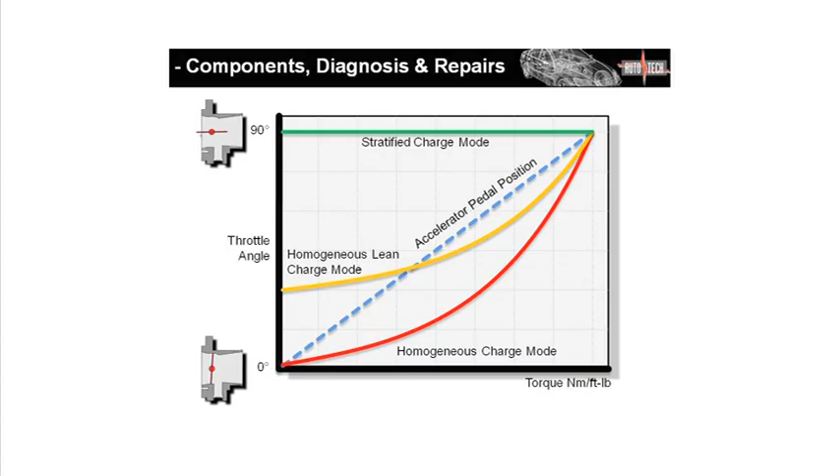Let's have a look at the manifold absolute pressure sensor. The design of the MAP sensor hasn't changed from the version that we currently use on traditional EFI-equipped engines. It may also be known as a boost sensor on vehicles with a turbocharger or supercharger, and it may also incorporate an intake air temp sensor. But most importantly, it has a new purpose, and that is to monitor manifold vacuum so the ECM can calculate when to operate the EGR system. The Holden 3.6 litre engine is the only engine we've looked at that doesn't use a MAP sensor.

Next on the list is the variable intake manifold. First thing to note with the variable intake manifold is that this isn't a variable length intake manifold. This is a very different component. This kind of variable manifold controls how the air enters the cylinders of the engine. By opening and closing the intake manifold flap, the air can be sped up or slowed down, or it can be made to swirl or tumble.

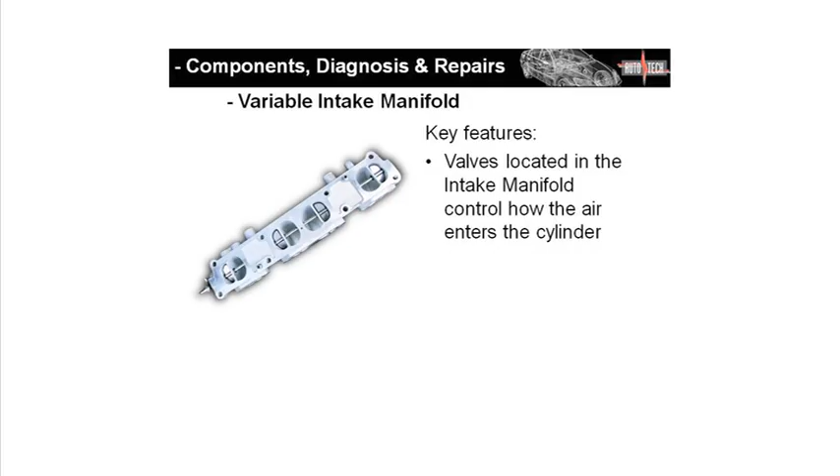The variable intake on Mazda vehicles uses an ECM-controlled vacuum actuator to move the intake manifold valves. Volkswagen use an electric motor with a position sensor to provide feedback. Holden do not use a variable intake on their engines.

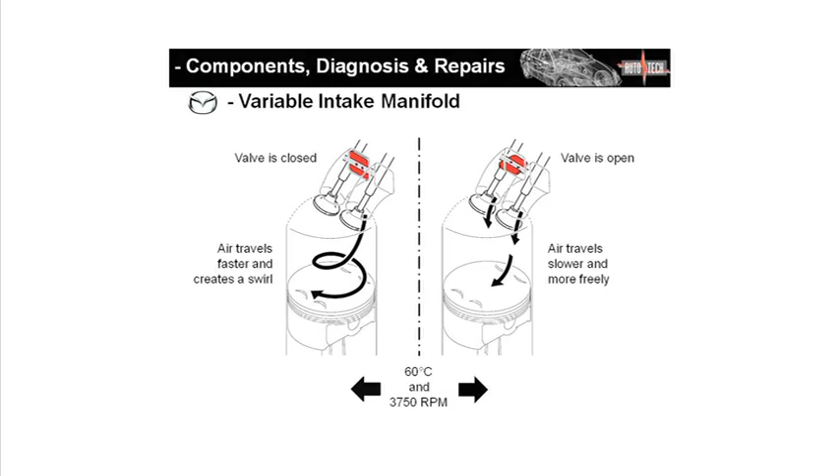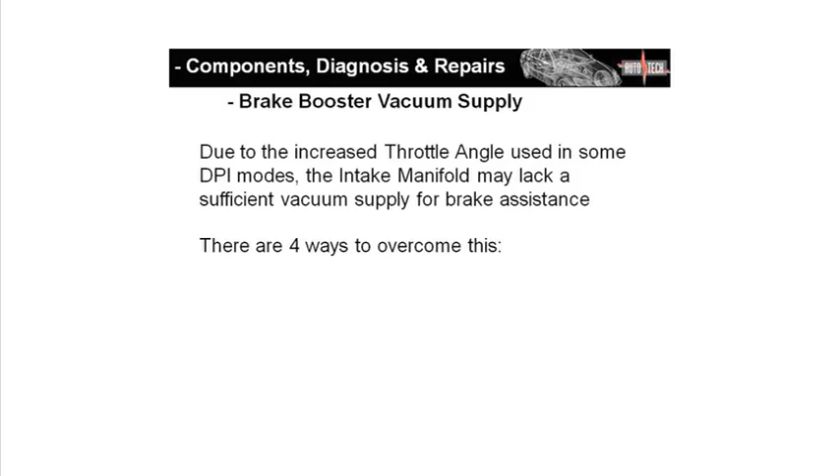Earlier in the video, I spoke of how the different injection modes can alter the way the throttle plate opened and closed independent of the accelerator pedal movement. This change brings with it the risk of the brake booster running out of vacuum for efficient brake assistance.

So manufacturers have had to find a way to overcome this. Methods include using a vacuum reservoir, commanding the ECM to close off the throttle plate when vacuum has dropped below a specified level, using a vacuum pump similar to that of a diesel vehicle, whether it be electronic or mechanical, or using an electronic booster.

Holden use an electronic vacuum pump to create vacuum if the system senses that it is low. A vacuum sensor on the brake booster measures the vacuum level, and this is monitored by the ESP control module.

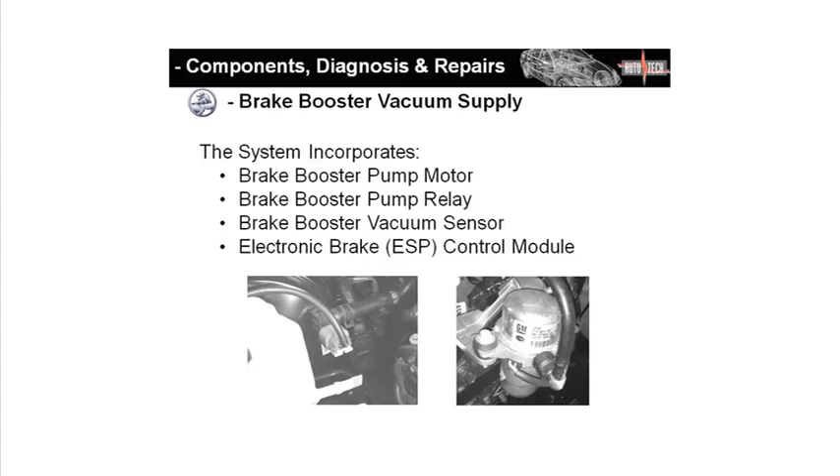Volkswagen used two different systems depending on which transmission is fitted. Models with an automatic transmission run a very similar system to that of the VE Commodore. The manual transmission version uses a sensor to monitor the vacuum at the brake booster. The ECM will command the throttle plate to close in order to increase vacuum when required.

And Mazda do not use any additional vacuum supply pump on their vehicles at this moment in time.

Now let's look at the servicing requirements. The servicing requirements for a direct petrol-injected vehicle are very similar to those of a traditional port fuel-injected vehicle. From what we can see, the only change will be that a standard fuel injector testing and cleaning machine will not be suitable for a DPI injector due to the higher pressures and voltages required to operate them.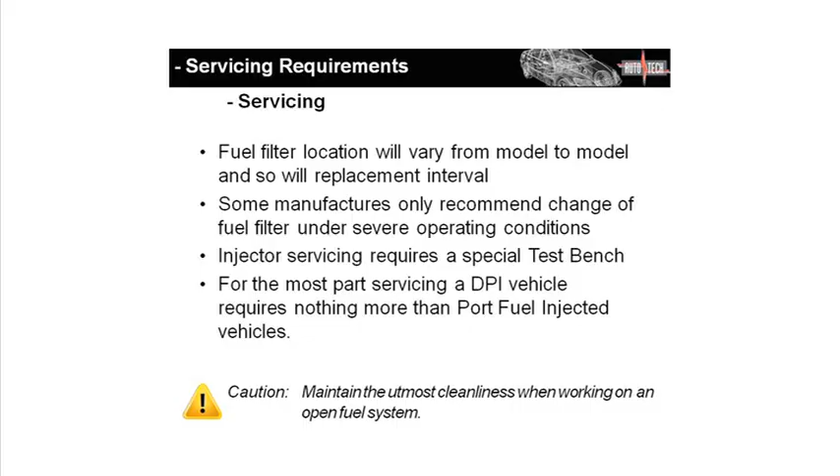Some common problems have been brought to our attention at Autotech. Here are a few of those problems.

We've heard reports that Mazda DISI models have been suffering from leaking injector seals. Seen here in a closer view, the oily build-up around the injector indicates that the combustion gases have been escaping past the seal.

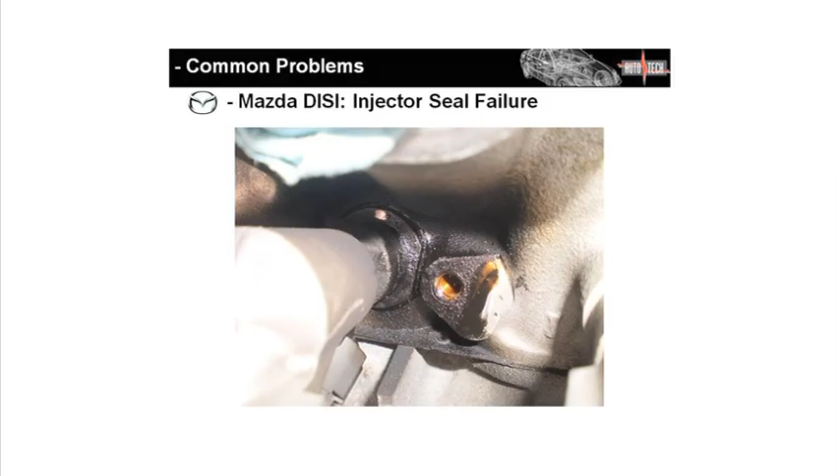On closer inspection, it was found that the sealing O-rings at the tip of these injectors were broken. The injector pictured on the left has had a heavy-duty aftermarket seal fitted. These are proving to be successful in fixing the issue. The injector on the right shows the standard factory seal fitted. These aftermarket kits should be available through your local Repco store.

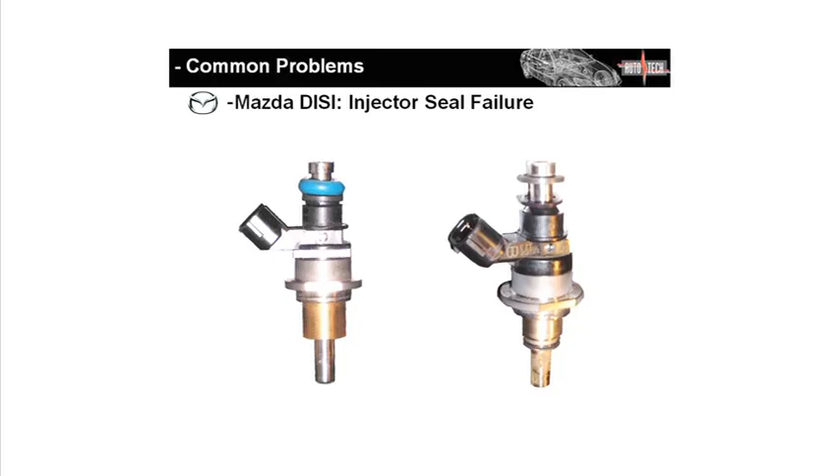Audi have released a technical bulletin concerning their 2-litre FSI engine built between 2005 and 2007. The vehicle will present with DTCs relating to fuel pressure and fuel trim. The issue is related to excessive wear on the camshaft follower fitted to the high-pressure fuel pump.

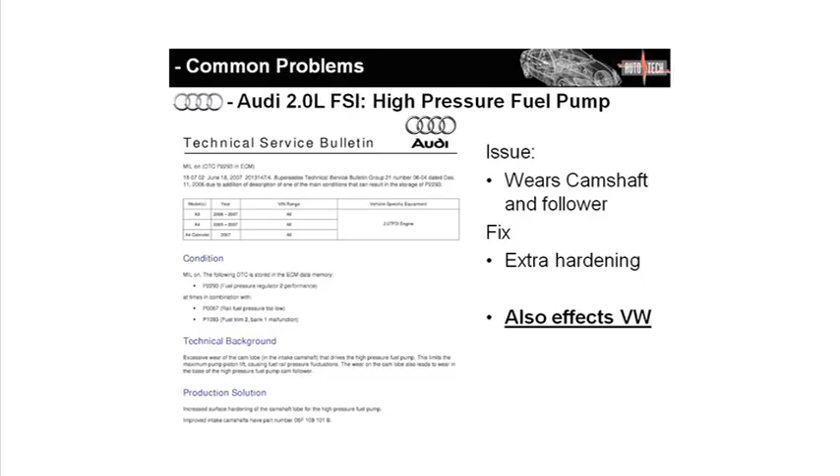Now let's look at E85 fuel technology. E85 fuel is also known as biofuel. It contains 85% denatured ethanol and 15% unleaded petrol. Denatured means that it has been mixed with roughly 4.5% of unleaded petrol.

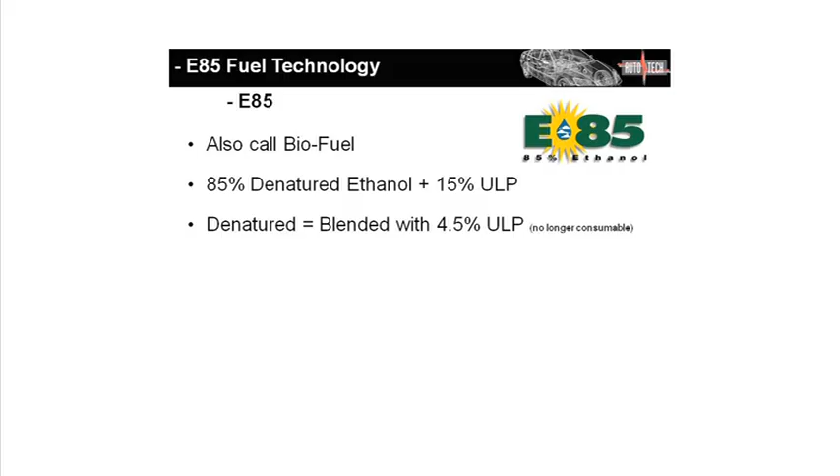E85 contains only 70% of the energy of standard unleaded petrol. Users of E85 report an increase in fuel usage compared to unleaded fuel. Having a research octane number of 105 means that in a specially designed high-compression engine, E85 performs extremely well in high-power applications. Some manufacturers claim they have built dedicated E85 vehicles that achieve better fuel economy than petrol equivalents.

E85 is not widely available even in metro areas, but it's on the increase. And just to note, ethanol-blended fuels should not be used for anything other than road transport use.

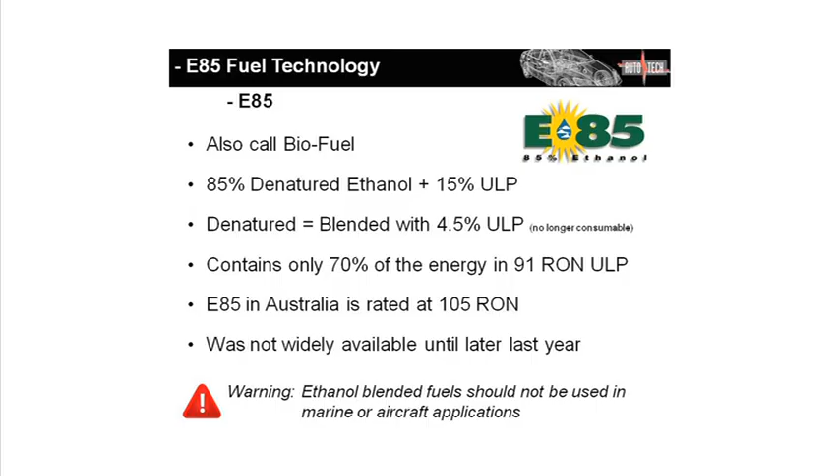Cars that run on E85 are often called flex fuel vehicles. The very first flex fuel vehicle was a 1908 Model T Ford and would run on anything from pure ethanol to pure petrol.

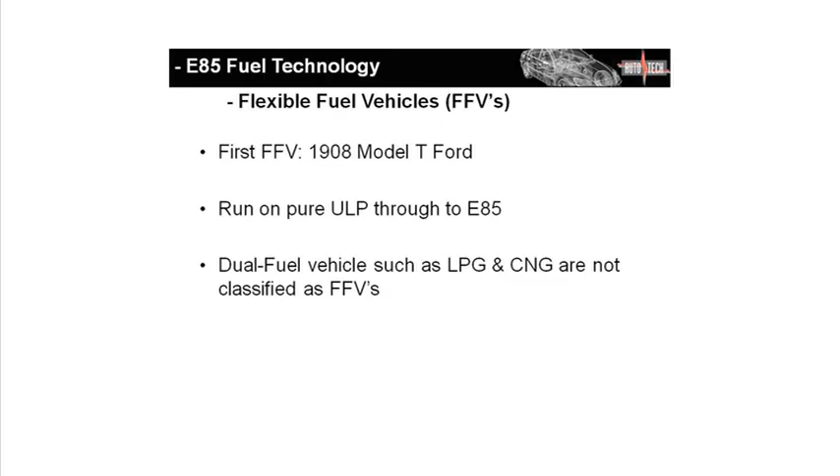Nowadays, a flex fuel vehicle is classed as an engine capable of running on anything from pure unleaded petrol right through to E85. A vehicle that requires two separate fuel tanks is not classed as a flex fuel vehicle. Therefore, dual fuel vehicles that use unleaded and LPG, for example, are not classed as flex fuel. And surprisingly, there are more than 22 million flex fuel vehicles on the road globally.

The flex fuel Commodore and Captiva use a sensor called a flex fuel sensor. This sensor is located underneath the car on the side of the fuel tank. It measures the ethanol content in the fuel and fuel temperature, allowing the ECM to adjust ignition timing and fuel injection to optimize the engine running conditions. For more information on this sensor, please refer to your manual on page 77.

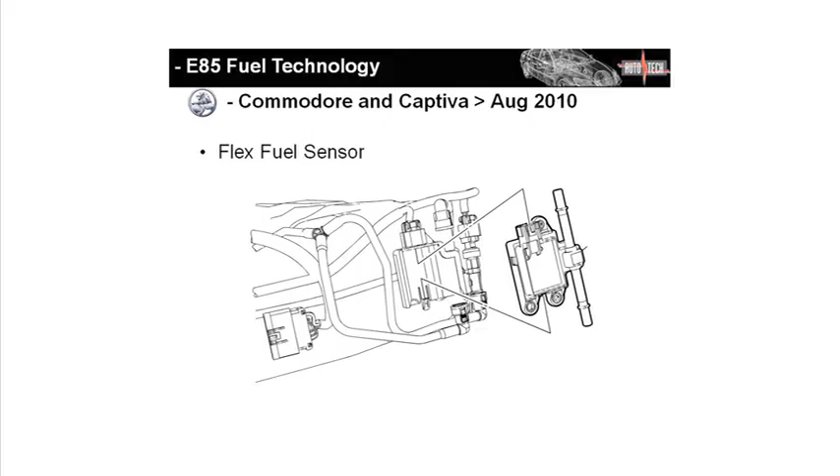Now let's revisit the questions asked at the start of the video. Homogeneous and stratified are words used to describe the different fuel operating modes in an engine. Homogeneous means that the air-fuel charge is well mixed. Stratified means that the lean air-fuel charge is layered by a curtain of air on the cylinder walls.

A NOx storage catalyst is a device designed to capture and regenerate oxides of nitrogen, a byproduct of high combustion temperatures. These are not yet used in Australia.

Vacuum pumps are often used on DPI engines due to the changed throttle plate operation and the possibility of insufficient vacuum to supply sufficient brake assistance. And the coil resistance for a typical DPI injector should roughly be between 0.5 of an ohm and 2 ohms.

Not so long ago, cars were pretty easy to fix and everything you needed was right there in your toolbox. These days, cars are more like computers on wheels, and having the right information is the most important tool of all. But where do you go to find this technical information?

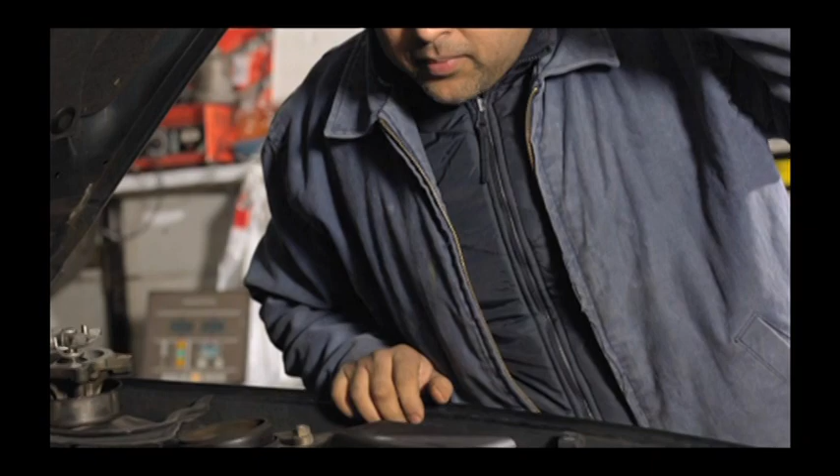Do you spend hours on Google looking for answers? Or maybe you call a mate, assuming he knows what he's doing, spending countless hours that can't be billed and losing customers as you try to fix the problems time and time again. As cars become more complex and manufacturers publish more and more technical data, how are you going to keep up?

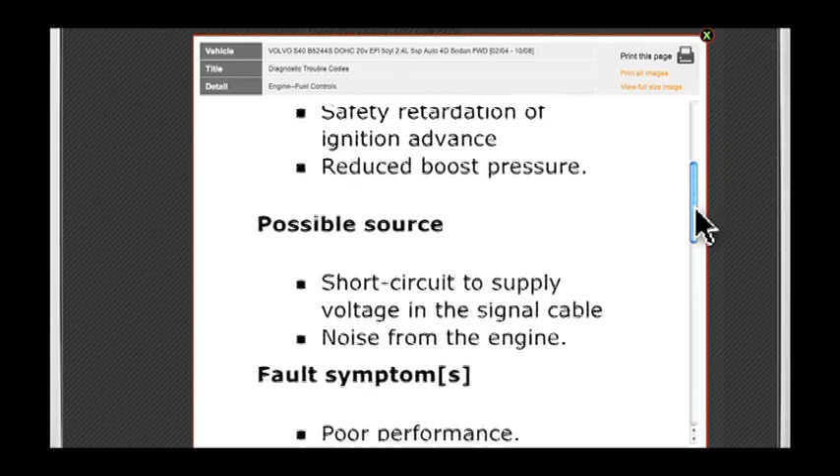Now let's see how Autopedia can help you sort out trouble code problems. Troubleshooting diagnostic trouble codes is as simple as clicking on the Diagnostic Trouble Codes icon and selecting the relevant code from the available list. These OEM diagnostic flowcharts are the same information that dealerships use to guide them step by step through diagnosing the problem.

If there's no information available on Autopedia, the category will be greyed out. No problem. Simply click on the greyed out icon and a Tech Help request form is generated.

Just got your priority help email, and I want you to confirm it's the 2008 model. Okay, fine. I'll be sending that information to you in a few minutes.

Well, gone are the days of your points and plugs and things coming in for a quick tune-up. Now everything is very electronic based. Almost have to be a computer technician rather than just a mechanic. A car that's got an electrical problem, we need to be able to first diagnose it with our tools, etc.

Then we need the information on hand. That way we can actually work through a process to find out what the problem is and resolve it. The biggest thing we find is we can actually get the job done a lot faster, okay, because the information's here. I'm not faxing for information, I'm not ringing people trying to get a bit of a favour, can you send me some information on this?

It's all held within the program. It means our diagnosis time is much faster, everything's on hand, we get the job done and car back straight away to the customer. Saves a heap of time, in turn a heap of money. Thoroughly recommended. The process just works from start to finish.